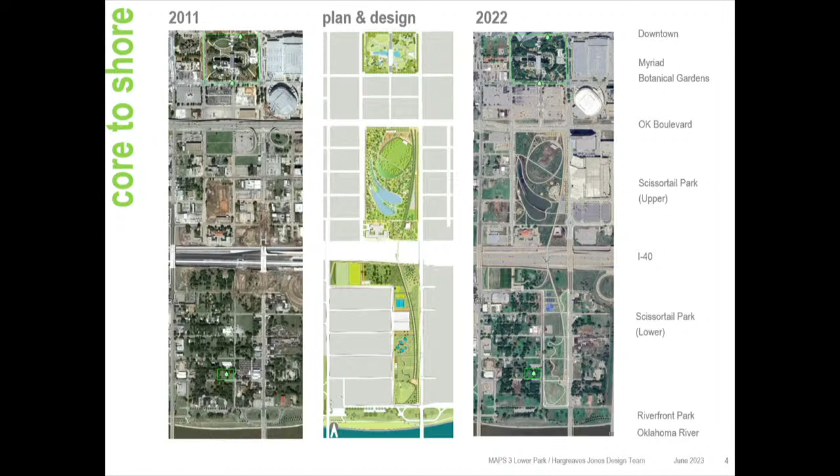But it did in a way that allowed us to be flexible in updating in that decade period. We could change it and modify it, still keep the original intent, and keep everything up to date as things advanced. So it's amazing to see it come to fruition now. So we're very thankful for that, with both the upper and lower park intact.

There's a few things along the way that are still embedded in the master plan, and these are still good ideas, but this is for another time, but still keep these in mind. Union Station is what was part of the master plan, and I'm happy to report that design is in progress now, and that will be one of the last things that will go before you all to approve the final plans and specs for that later this year.

The out parcel we were never able to get, but it's just sitting there, and it doesn't really matter until someone plans to build something on it, and then it may matter. It will look like the park is cut in half, but at the moment it's fine.

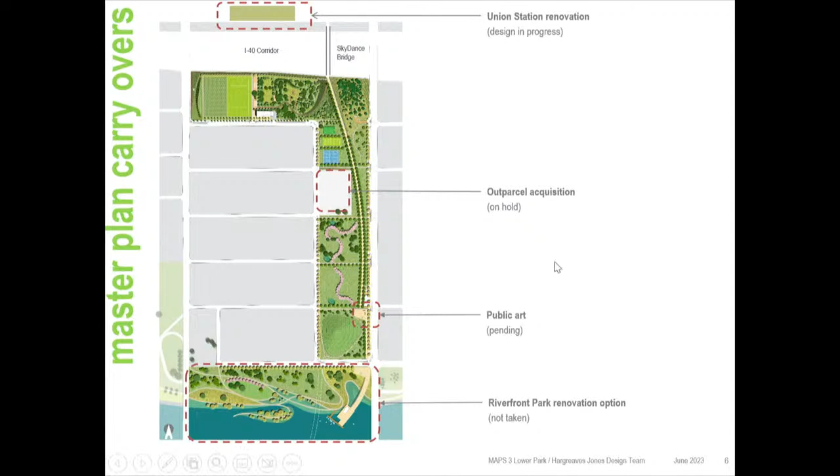Design and construction, thinking about success for that, and I told the subcommittee yesterday, there's a famous park that was like a terrible experience for everyone that worked on it for over 7 years in planning and design and 7 years in construction. Everything was late, everything was over budget, lots of people got fired, lots of politicians got involved.

Five years after it opened, everyone forgot about it. And 160 years later, nobody remembers that. That's Central Park in New York. It's an unusual aspect of the design and construction of parks - parks are in our lives for a very short period of time, and we don't value them as part of the foreground in our life. They're always in the background, so they're very difficult to get through design and construction.

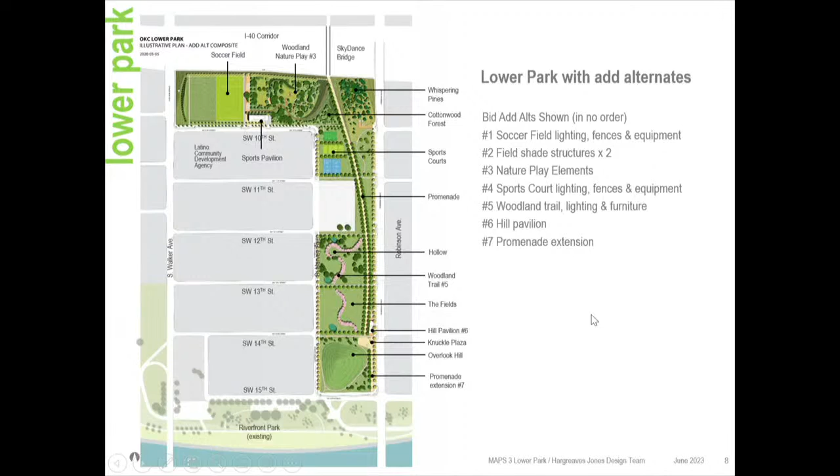But here it was different - it has actually been a very successful process. I'm just going to run through the features of the lower park that were embedded in the design. Thank you very much for finding ways to accept all the alternates in the bid - it's given the park a great start.

The soccer field was obviously a big part of the plan. We've got one synthetic field there, and space for another one in the future. Right next door it's grass now, but it can be converted to a synthetic field. At nighttime that's the place to be, with the games going on.

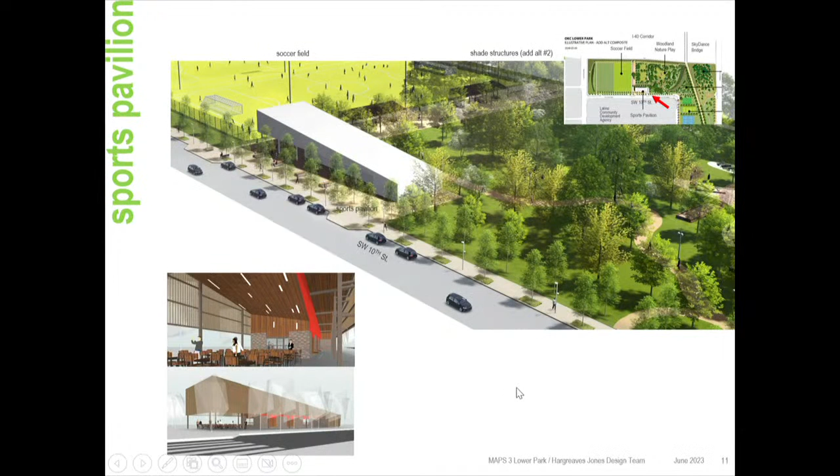The sports pavilion has also been very successful. It's a great building, and it's magical at night. I'm still amazed at that perforated metal screen - it looks solid during the day, but at night you can see right through it.

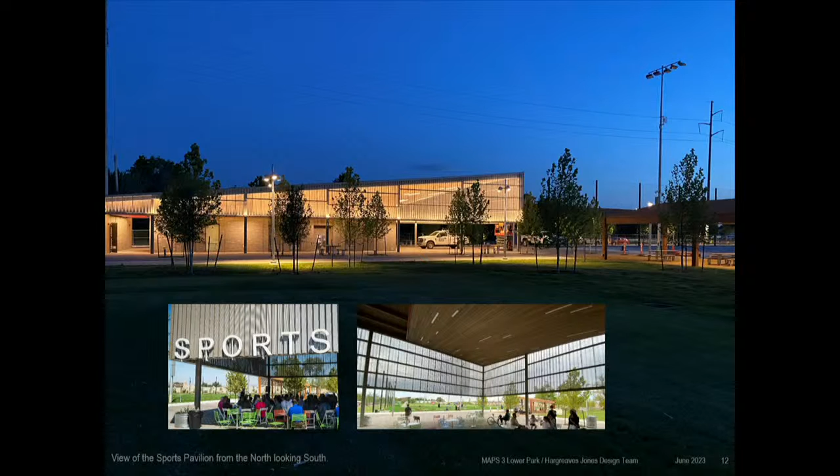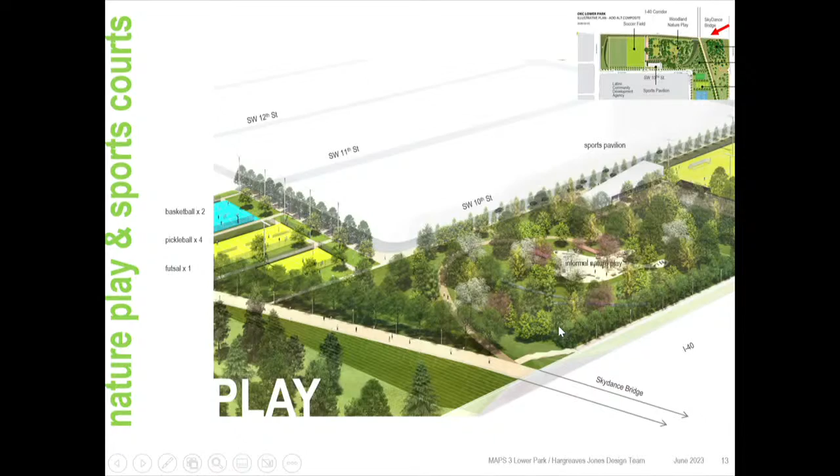In the lower park we had existing trees, and we went to a great deal of trouble to preserve those, basically by moving the sports courts a little around to the corner. It's made all the difference, keeping those trees - I'm glad we all made the decision to do that.

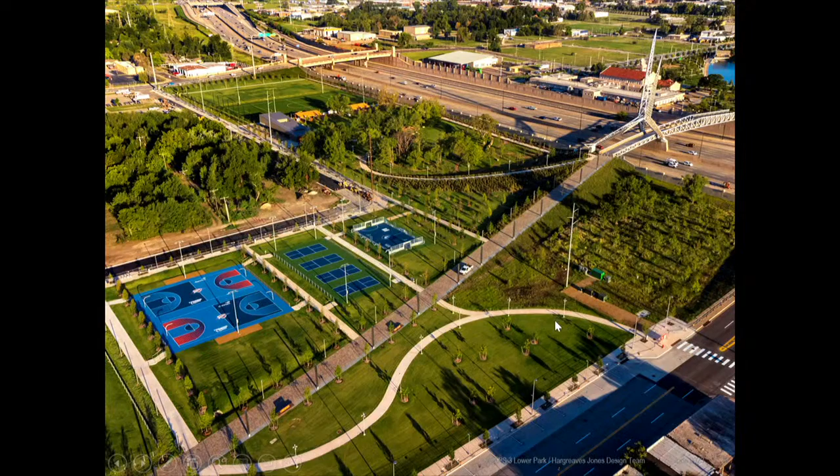The sports area too - the rental on the courts has been amazing, and the response and diversity that's happened there. And just under the trees, kids are able to play around on logs and rocks that are there. I'm sure Maureen and her team will come up with different ways to enliven this.

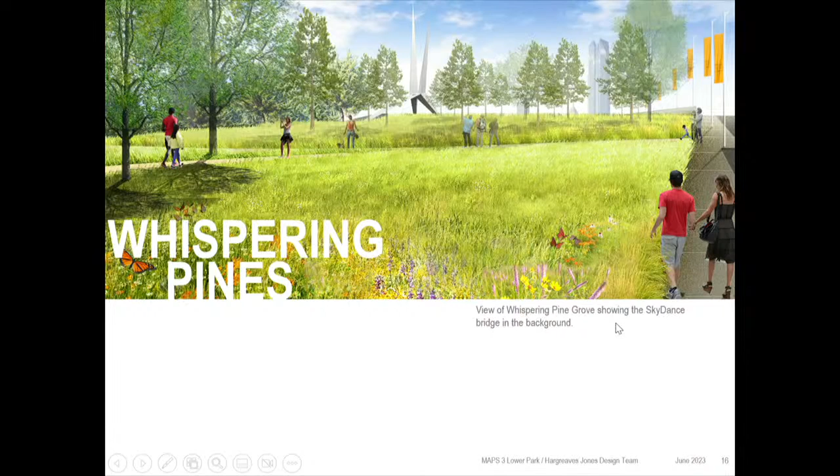The Whispering Pines area, which was basically for habitat in that interim space, is almost like the drawing - it's basically there for the birds and the pollinators that go with it.

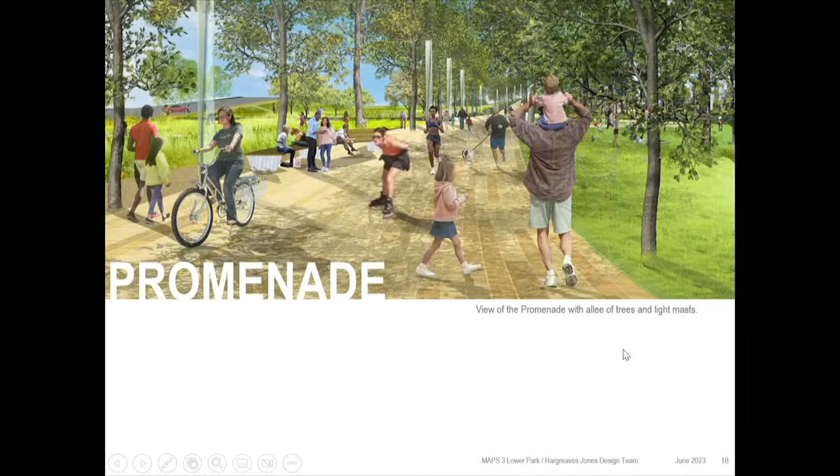The promenade, continuing it all the way down to 15th Street, has been amazing. The fields in the middle have the winding trail through them - it's become the kind of jogging route to run down from the city to the river and back again. Over time, Maureen and her crew will find ways to program this with temporary things and activate it. They've just planted some more wildflowers around the pathway there, so that will be coming up before fall this year.

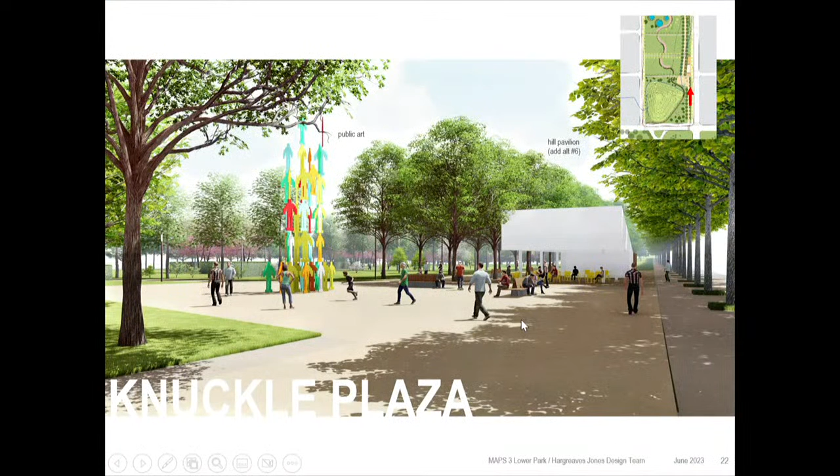The plaza with the building - as I said before, the artwork is still going to come, so stay tuned for that. That little building is like an outpost way down at the bottom of the park. But in the end, when people start to rediscover the river, it will find its own way into the area as well. The hill itself is the place to be, and in fact it's worn out on the top - so many people up there enjoying the view back to downtown, but also to see the river as well. That's been extremely successful.

Our construction cost was just over $25 million, with 13 change orders that you approved along the way. Thank you very much.

Construction period ended up at about 23 months. I said yesterday we actually had as much rain as we did in the upper park, which was a real challenge - in the upper park we had rain, but it was all at the wrong time. In the lower park we had different challenges, one being utility companies not getting out of the way in time. Our contractor, Wing Construction, to their credit, worked around those without stopping work, which is fantastic. We had COVID, of course, and supply chain issues - that's the only project I've been involved in over 30 years where the roof went on last to the buildings because they couldn't get the material to do it.

Credit to them, and the remediation that we discovered along the way - you all approved some extra money to get that out and safely into a landfill. So thank you very much.

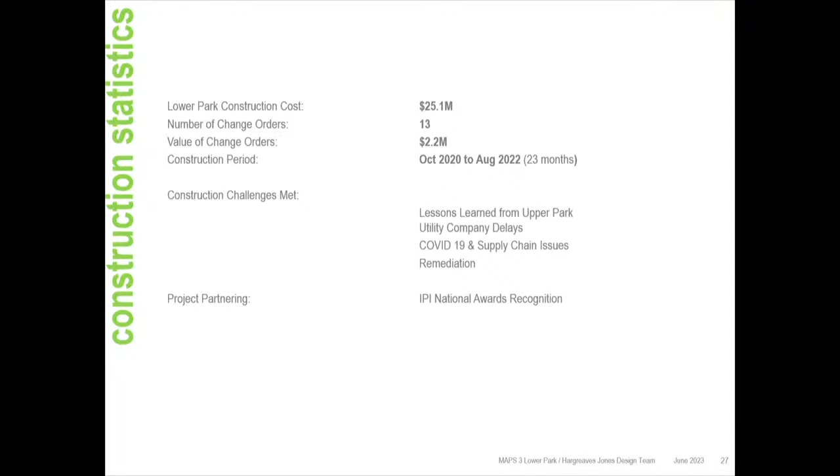I think the most valuable thing we were able to do was staging the upper and lower park independently. Originally it was perceived we'd do them back to back, but that allowed a lot of lessons to be learned. The MAPS team, the design and construction team, were able to incorporate those lessons, and we were all rewarded with a partnering award that Todd accepted in San Francisco just last month. So the design and construction was a success, unusually so.

And so the upper park's been open for almost 5 years now. Maureen and her team have done an amazing job in terms of programming. It's incredible, the diversity of not only the program but the people that show up as well. And it truly is a park for everyone.

There's about 800,000 visits annually to the upper park. This is 2022 figures. It's got a 4.8 rating on Google. Only the Oklahoma Museum and Memorial gets a greater rating. It has 280 events annually, and both the attendance and number of events is higher than what we anticipated in the master plan. So credit to her and the people of Oklahoma City who are showing up.

Over 6,000 kids have been hosted through the educational ranger programs there. They have 1,100 volunteers on the books. Not all those are active, but everything helps in terms of maintenance of the park. It's been accredited as an arboretum, a level 2 arboretum, which is amazing. And just last month, it was voted best splash pad in the USA, which is good.

So what's yet to come? The economic part of the master plan is still kind of in play. The idea of core to shore and the park itself - what's going on now is the land around the park is being reevaluated, and the market's kind of crazy right now with the pandemic and talk of recession or not recession. But eventually it will happen, and development will come around close to the park.

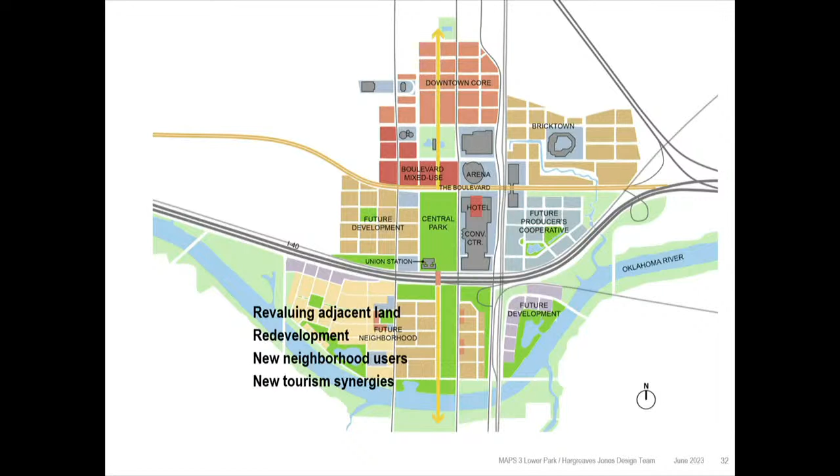Michael? Yeah, I'd like to thank Gavin for working with us for a lot of years on the Park Subcommittee, and particularly for your patience and skills in working with people like Anthony McDermott and myself, who I know can be a pain from time to time. You've handled us well, and we came out of this unscathed, and you've done an incredible job, you guys.

Thanks very much, Michael. Anyone else? Well, I want to add my thanks, Gavin. It has been a long but wonderful journey. I hope you'll convey to Mary Margaret our thanks for the great skill and effort that your team put into this.

There's obviously a lot to learn for all of us, but the blend of trying to create a space where people would make long-term investments, but also a park for everyone, something that everyone in our community could enjoy. I know you already know this, but the Philharmonic is performing there, the ballet is performing there. There are things going on there, and people are getting to participate in those things that might never have occurred without the city's investment in this park for everyone.

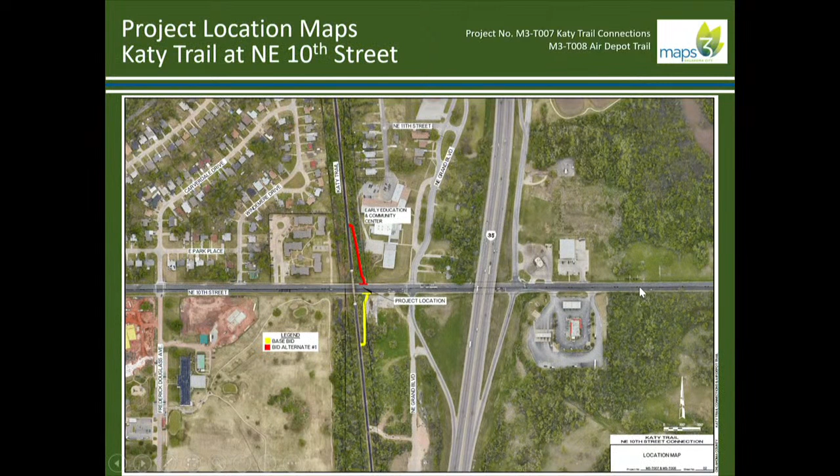So just to orient ourselves, starting with Northeast 10th Street, again, that south side connection in yellow is the base bid, and the north side is bid alternate 1.

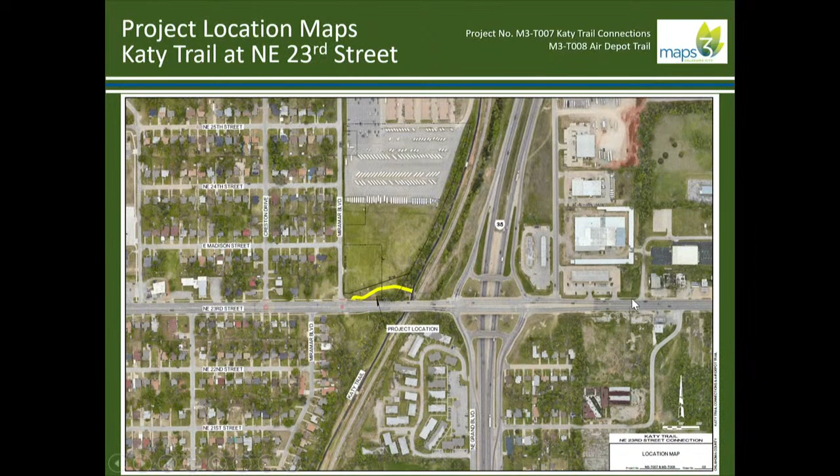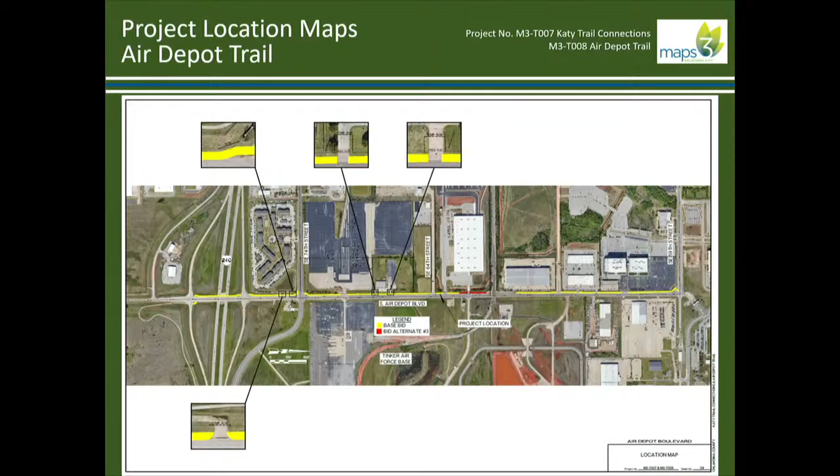So going through the typical sections, this is what we came to after working with the Parks Department. This is nearly identical to the Greenway Trail project out there on the north side of the river now. It's 6 inches of concrete over 4 inches of ag base.

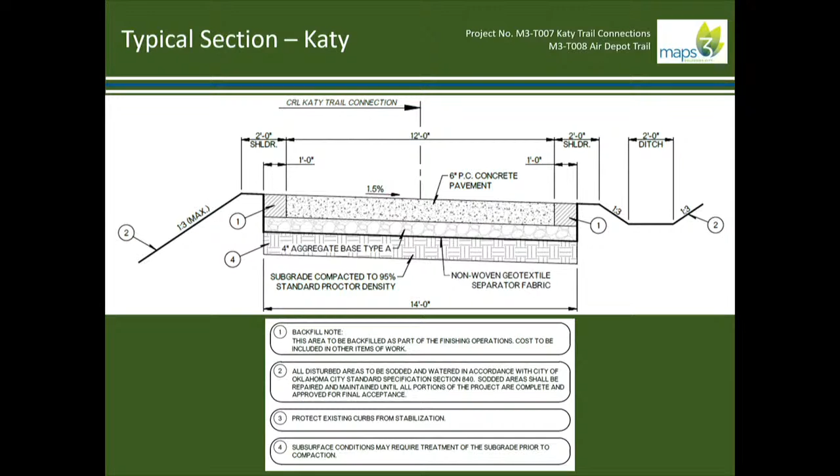Here specifically is the Katy Trail typical, just an open section. Air Depot is identical, except that it's primarily at the back of curb because of the cramped corridor with right-of-way and utility constraints, but otherwise the same thickness.

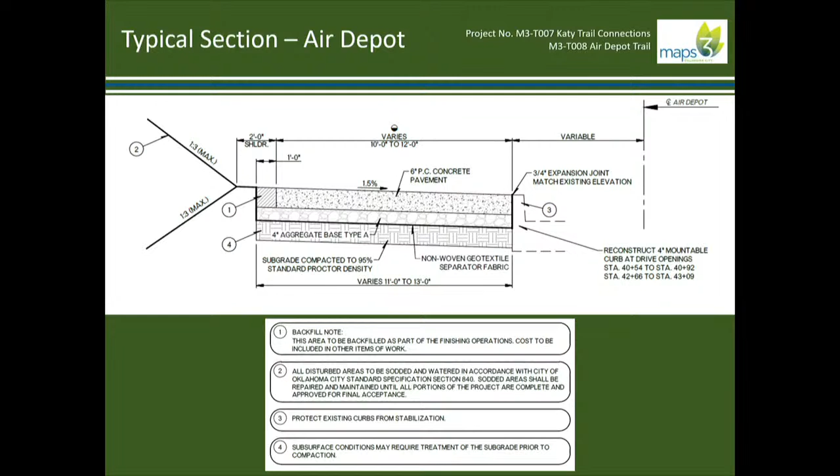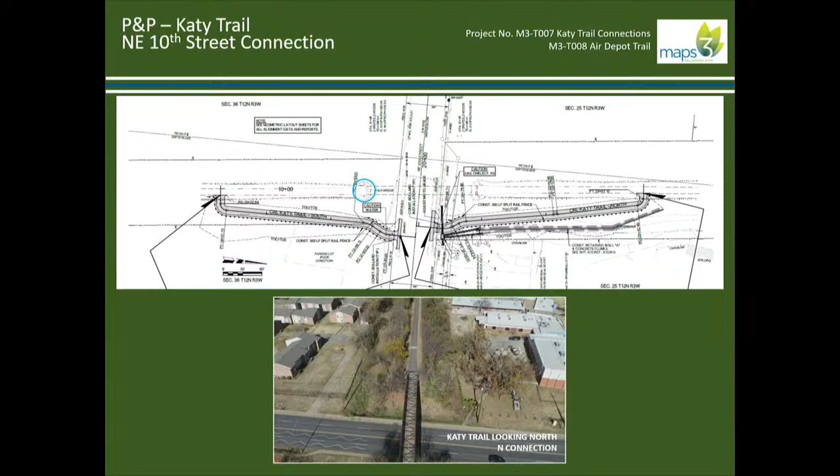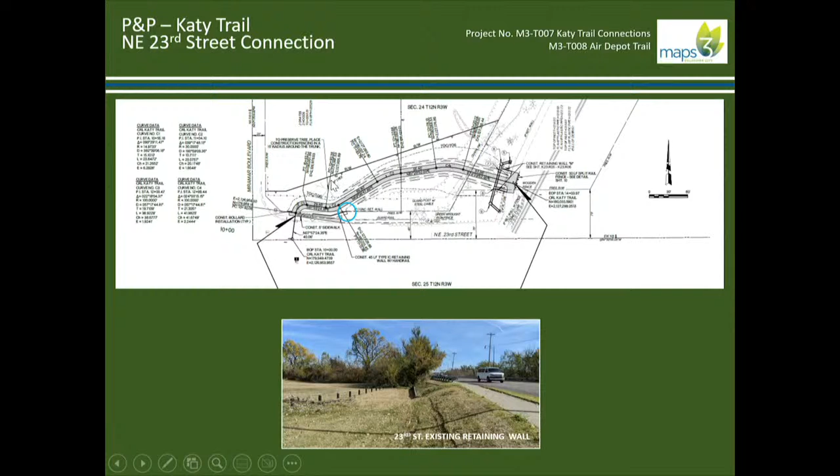Up at 23rd Street, very similar design, a little longer, 350 feet. Up near the road where the trail ties into the existing sidewalk, the trail has a bit of a jog in it, to fit in between a retaining wall that runs alongside the road as well as a tree just off the left side of this image. We jog around this tree, it's a very large one we're trying to preserve, and we have details in the plans to preserve it during construction specifically.

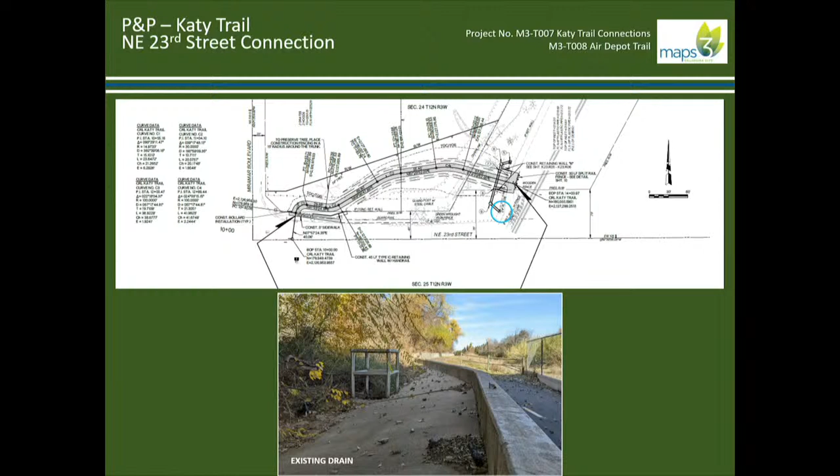Down where the connection will tie into the existing Katy Trail, there are a couple of drainage structures out there now that we'd be tying into with the proposed drainage. This is the first one, which will stay in place. This is the other existing structure, quite overgrown, but that'll get replaced with this construction. And right here is where the connection would tie in.

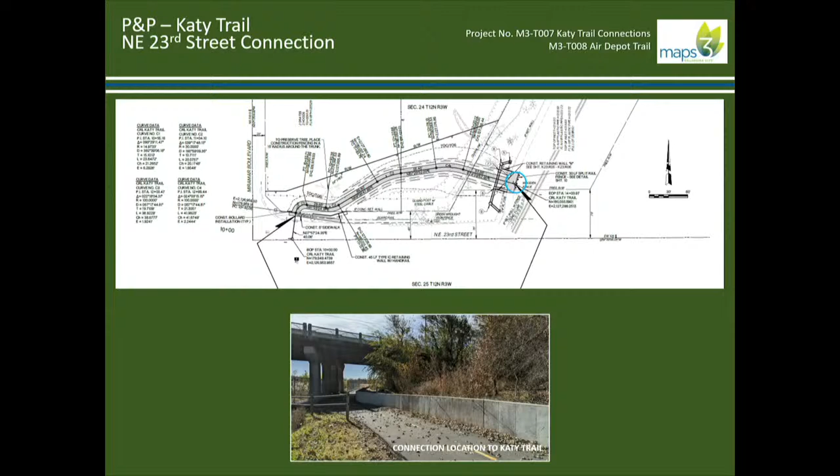So we'll basically be cutting a hole through this retaining wall, tying the trail in, and then building 2 short retaining walls back to hold back all that soil that's there now. And just an aerial to give you a different perspective of the same location.

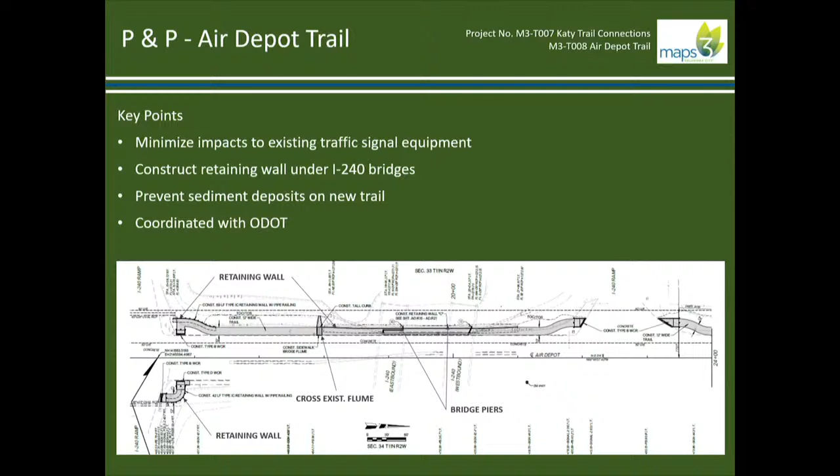Going over to Air Depot, as I mentioned before, we start by picking up the Tinker Draper Trail. This photo is on the south side of this interchange looking north. We're going to use a similar retaining wall and railing configuration that's out there now around this intersection, really with the goal of minimizing impacts to the traffic signal equipment that's out there now, reducing costs as much as possible.

Then, as we hop over to the west side of the road and carry north, we'll cross under the I-240 bridges. What's out there now is a 6-foot sidewalk that ties into that slope wall, the concrete coming down off the highway to the existing sidewalk.

So to fit a wider trail section, we have to cut into that slope wall, build a short retaining wall, and include a flume at the top side. That'll catch sediment currently washing off the highway onto the sidewalk, so it gets diverted and isn't on the new trail. Throughout this process we've worked with ODOT, kept them in the loop, and they're on board with it.

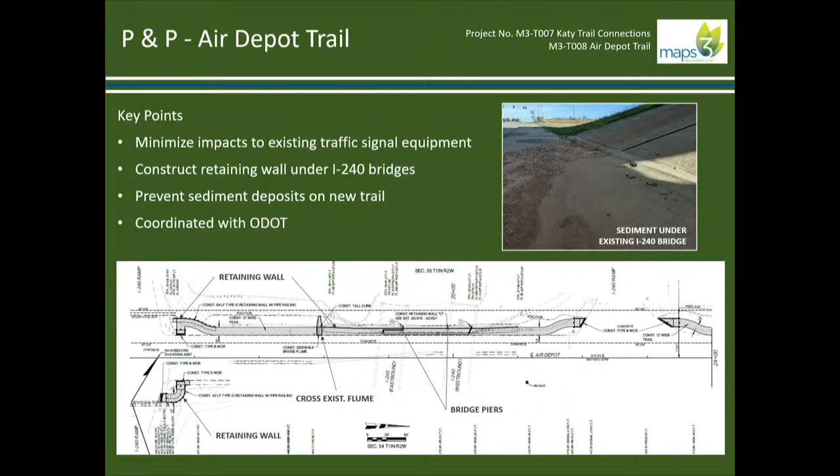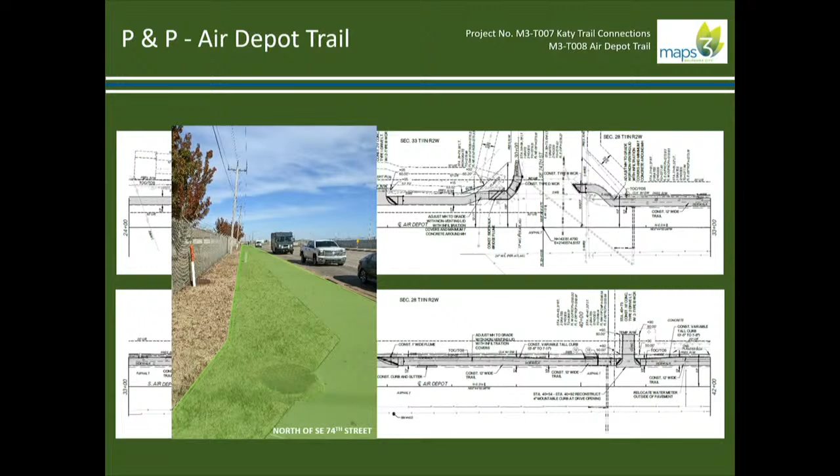Then we continue and cross over a double 10x4 bridge box. The 12-foot wide trail will fit between the back of curb and the head wall of the structure, but to protect that 4-foot drop-off, we're going to include some railing along the top of that structure.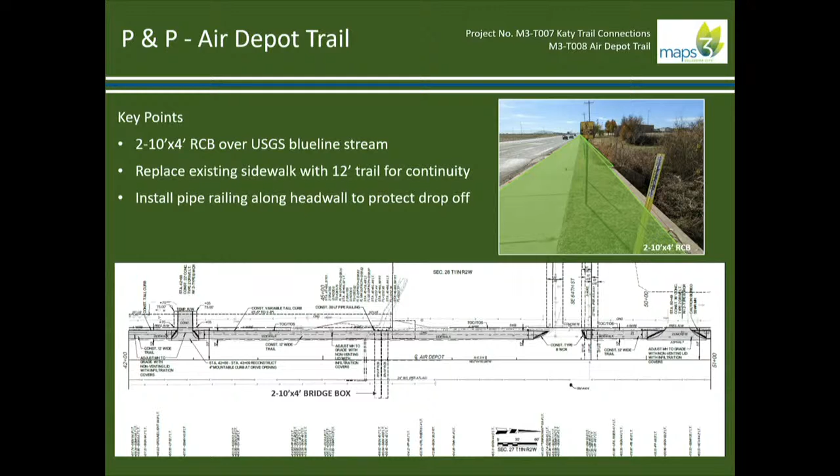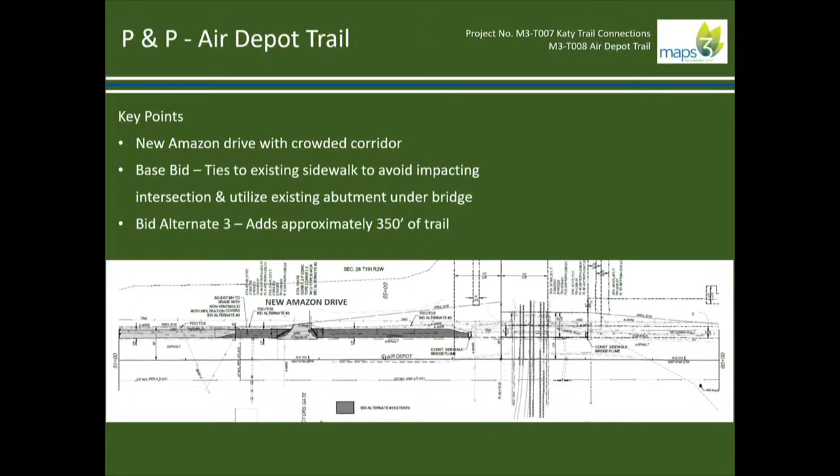Just before we get to the BNSF bridge, the base bid for Air Depot Trail actually ties into the existing sidewalk just south of this signalized intersection. The west leg of this intersection ties into the Amazon warehouse. As you can see from this photo, what's out there now is a 6-foot sidewalk as well as some signal equipment since it's a signalized intersection.

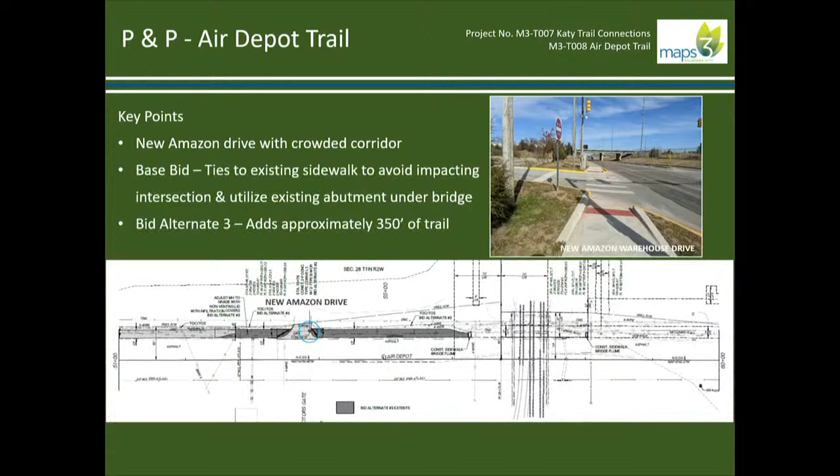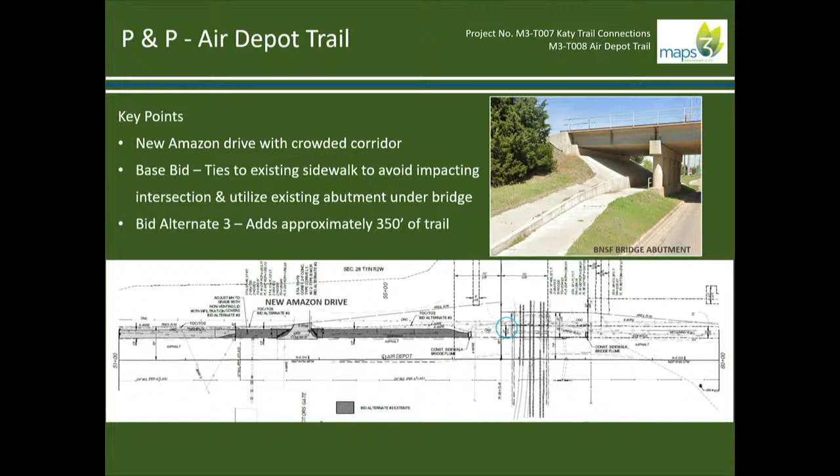We've got 2 signal poles as well as a traffic controller cabinet. The base bid will tie in south of this so we're not impacting that equipment and incurring those costs, but bid alternate 3 includes relocation of these signals and extending the 12-foot wide trail another 350 feet through this intersection, then tying into the existing sidewalk just south of the railroad bridge so we can utilize the existing retaining wall and sidewalk without getting into that bridge's structure.

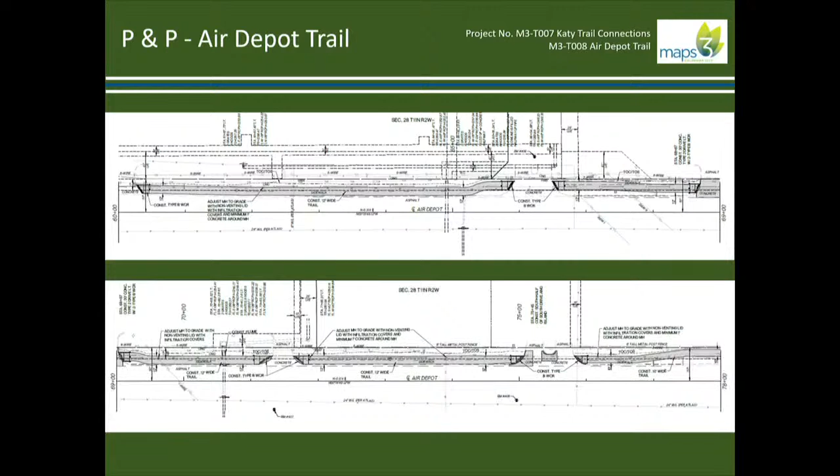North of the railroad bridge, it's pretty straightforward. The right-of-way opens up and there's plenty of room for the trail. Then as we get up to Southeast 59th Street, the trail narrows back to about 10 feet because Air Depot starts to widen for the intersection. But the trail will tie in through the pedestrian refuge island and then tie into the existing on-street bike lane that continues on Southeast 59th Street.

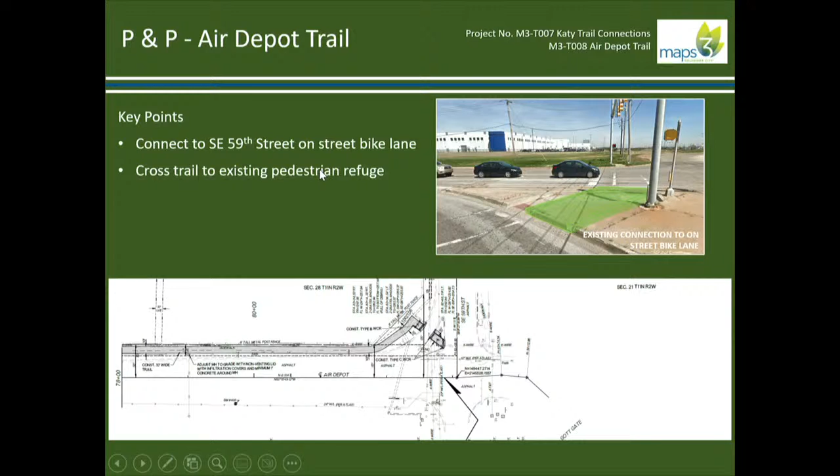That's all I have. So thank you for your time, and happy to answer any questions.

Questions? Thank you, really appreciate it. Yeah.

David, any comments about this? No, sir. Well, yes, I am. I'm glad that we're able to continue to expand the trail system, that we were able to have this excess money.

Did you have a point? One question from me, David, looking at the time schedule he's described and thinking about how we continue, these projects are going to continue into 2024. Is there any thought given that the final approval might be given to the MAPS 3 Citizens Advisory Board, or how does this affect our service? If the board ceases to function as they have been, I think it'll just go straight to council. Okay, alright, well we haven't been looking at too many things going into 2024, and I just wanted for us to think about that. Yes, sir. Okay, alright.